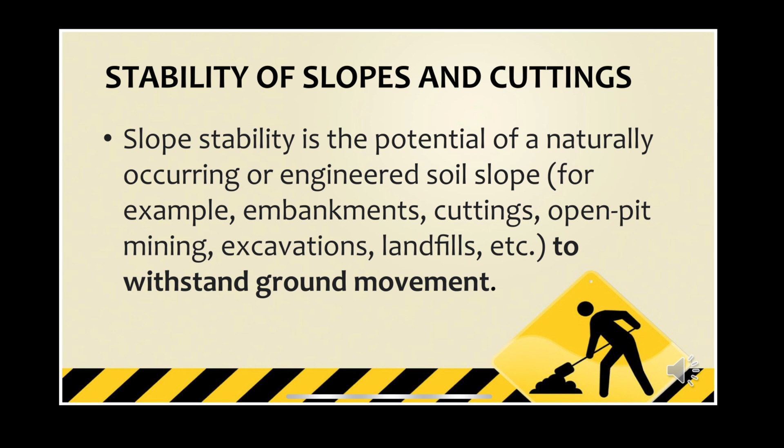We have examples of engineered soil slopes: embankments, cuttings, open pit mining, excavation, and landfills. We also have the stability of cutting in rock, which is usually dependent on the occurrence of joints and other planes of weakness, and on the amount of cohesion and friction across these planes.

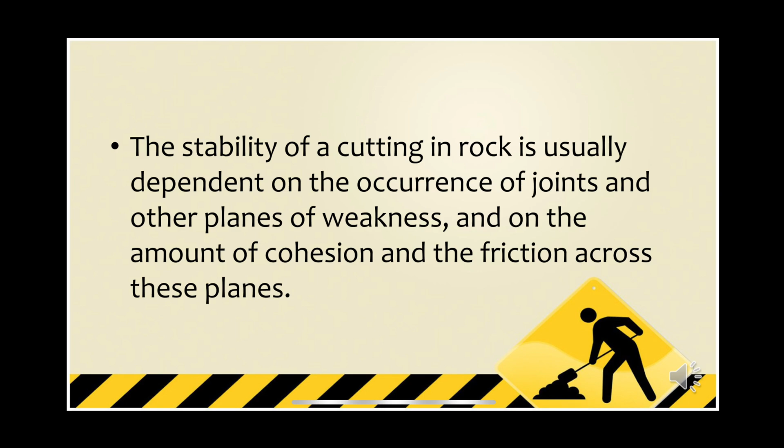We have geological factors affecting the stability of a new excavation. The static conditions that control the initial and later stability of a steep face cut into soil or rock, which may determine the need for support or remedial treatment, are as follows.

First we have shear strength. Shear strength by definition is the ability to resist forces that cause the material's internal structure to slide against itself. So the shear strength of the material forming the cutting is the stability of cutting in a rock that is usually dependent on the occurrence of joints and other planes of weakness, and on the amount of cohesion and friction across these planes.

We also have the structure of rocks and soils, specifically how any planes of weakness are oriented relative to the newly exposed face. For example, horizontal bedding planes in poorly jointed sandstone often give near vertical faces which are stable, whereas faults or joints striking parallel to the new face and dipping steeply towards it will probably be planes of movement or potential instability.

We also have groundwater condition, where saturation significantly lowers the strength of most soils compared with their values when dry. Certain soils weaken to a stage at which they run like viscous liquids. High pore pressure of groundwater in a layer or any plane of weakness lowers frictional resistance to movement. This mechanism is the same as that which allows a hovercraft to glide over water or land on high pressure cushions of air.

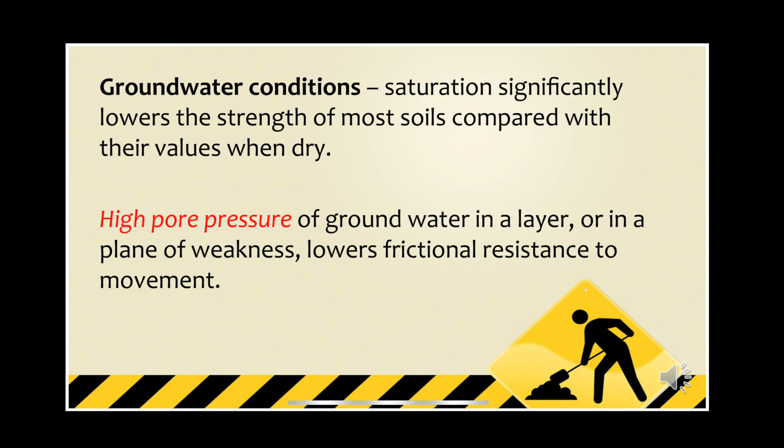We have the tragedy, a disaster in Aberfan in 1966, when a spoil heap of mine waste slid downwards onto a Welsh village, enveloping and destroying a large part of the local school.

We also have stresses produced by natural loads adjacent to the cutting. Steep-sided valleys or mounds affect the state of stress in the ground near the surface, not only below themselves but also for some distance around. This lateral change in stress conditions may be sufficient to cause instability of weak rocks and soils.

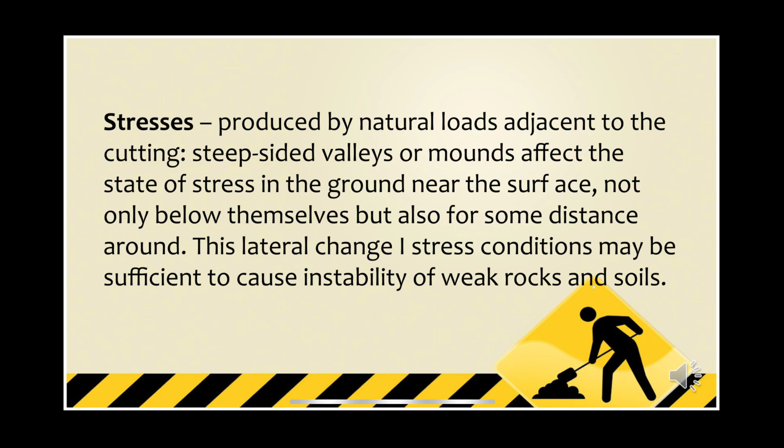Also, we have other geological factors causing instability of existing slopes. An initially stable slope may become unstable with the passage of time because of human disturbance. This may consist of adding a fresh load such as a spoil heap, removing support by excavating, or triggering movement by vibration from nearby heavy machinery.

So we have common geological causes that cause instability of an existing slope. First, we have weathering of the soil or rock of the slope so that it becomes weaker. This may affect the bulk of material, for example boulder clay, or may be concentrated along planes in a rock. Chemical alteration of existing minerals is important under certain conditions, as is mechanical breakdown in others.

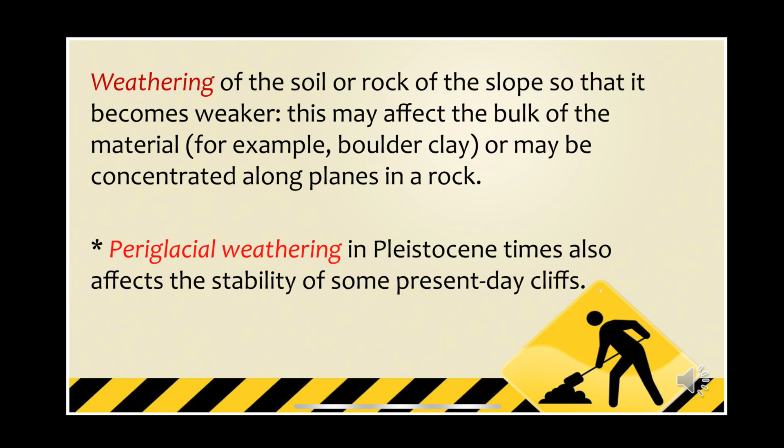We have periglacial weathering in Pleistocene times, which also affects the stability of some present-day cliffs. Erosion of the slope by a river or natural agent, usually at its base but possibly along a weaker layer or plane, may cause undermining to take place.

Also, the change in water content of the soil or rock. Heavy rain, especially after drought, saturates the material forming the slope, increasing its mass and gravitational pull on a given volume, and also reducing the strength of soils and friction along any discontinuities.

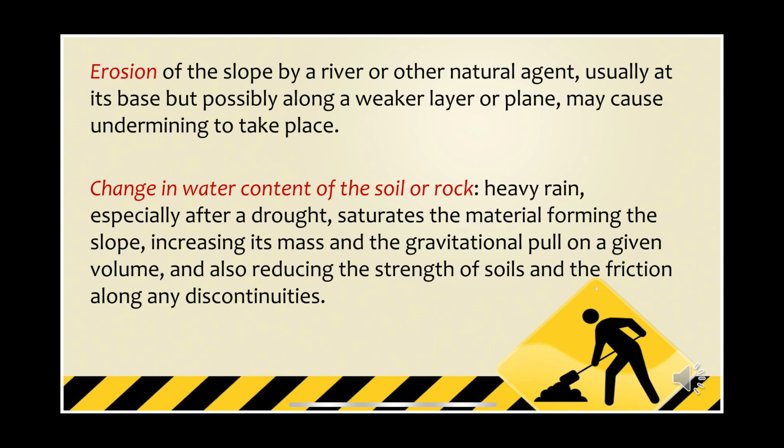There are types of failure of soil slopes. Instability of soils on a slope may take one of the following forms. One of these is creep. Creep occurs on steep slopes and produces a downhill movement at low rates, less than 10 mm per year, of the top few meters of soil.

It is facilitated by the effects of frost and by heavy rain washing out fines from the soil. Any excavation on a slope affected by creep is likely to increase movement. Creep may be recognizable by displacement of fencing or cover of turf, or by the drag effects of strata under the soil.

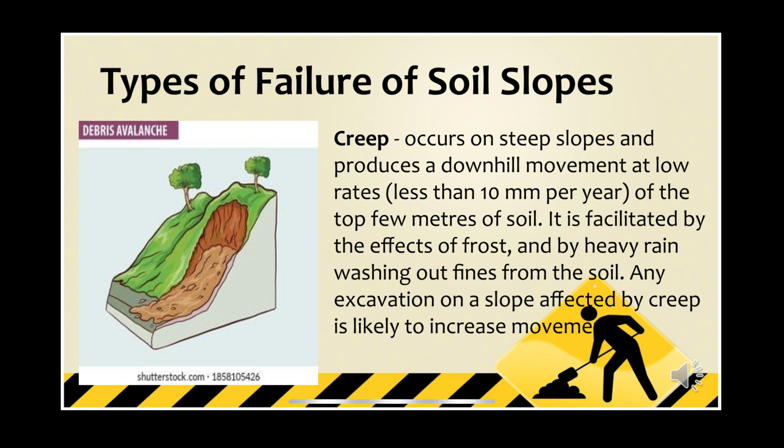We also have flow. It is a rapid movement of waterlogged soil, broken rock, and mud downhill. It usually happens after a prolonged rain has occurred.

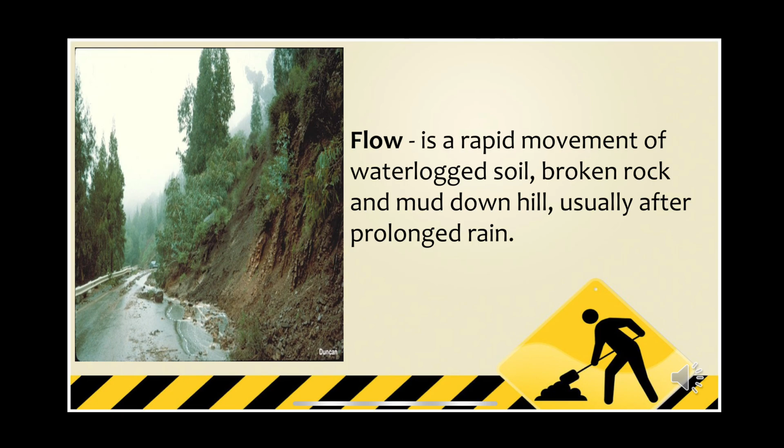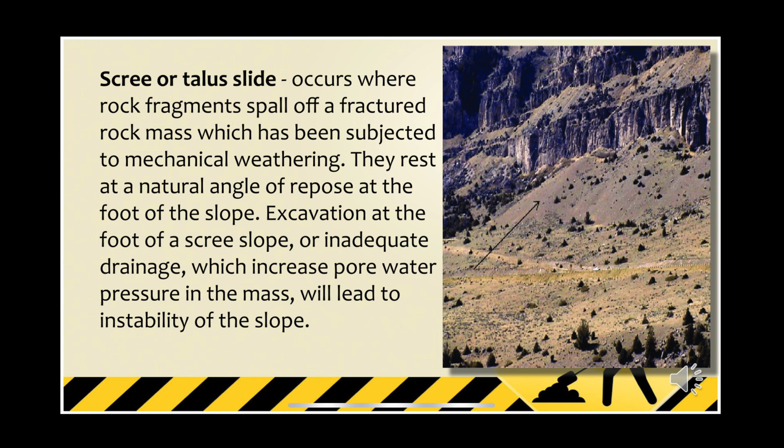Scree or talus slide occurs where rock fragments spall off a fractured rock mass which has been subjected to mechanical weathering. They rest at a natural angle of repose at the foot of the slope. Excavation at the foot of the scree slope, or inadequate drainage which increases pore water pressure in the mass, will lead to instability of the slope.

The third is translational failure, which involves movement along a particular plane of weakness in the soils of the slope. For example, in a slope formed of a clay layer within sand layers, deterioration of the shear strength of the clay may lead to movement at the boundary of the clay and sand. Failure of this type may occur with a slope angle as low as 6 degrees.

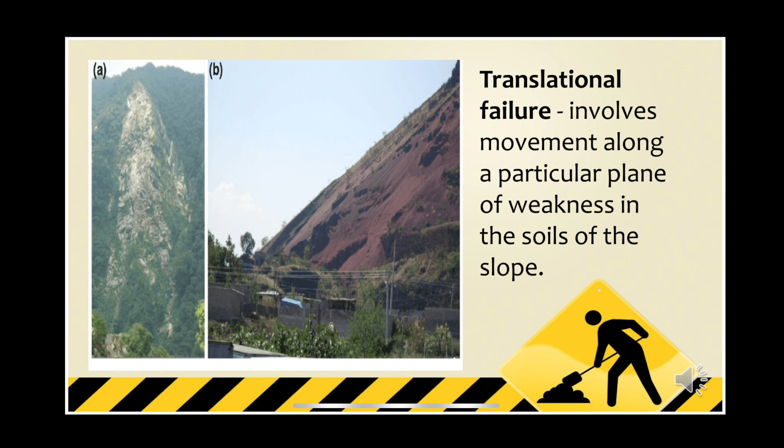Lastly, we have rotational slip. Rotational slip affects clay or clay-rich rocks such as mudstone and shales. The surface of movement is curved, such that shear resistance along it is given by the equation: shear resistance equals cohesion added to the difference between the normal stress and the pore water pressure, times the angle of frictional resistance of the clay. Rotational slip is usually preceded by the development of vertical tension cracks at the top of the slope.

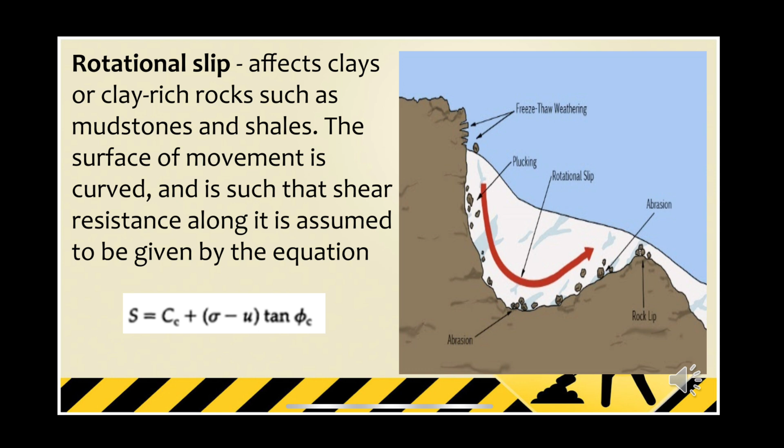This slide shows the legends of the shear resistance equation: the stress normal to the surface, pore water pressure, cohesion of the clay, angle of frictional resistance of the clay, and the shearing resistance.

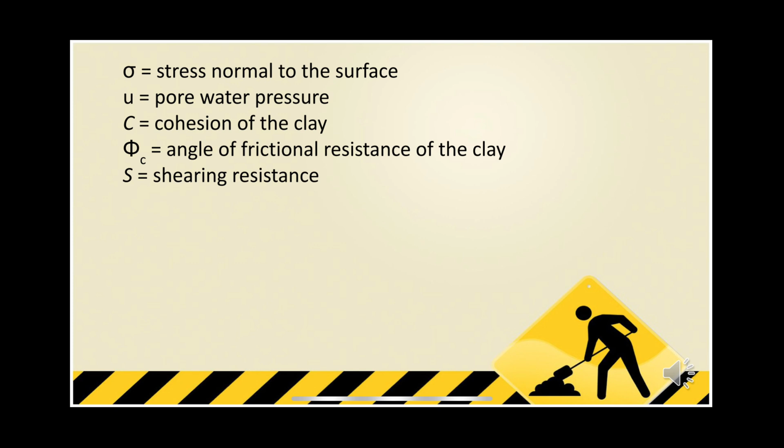There are also types of failure of natural rock slopes. One of these is minor rock falls, produced by weathering acting on unstable rock slopes. The susceptibility of a given rock to weathering processes can be estimated by determining its saturation moisture content and swelling coefficient. Igneous and high-grade metamorphic rocks with values of less than 1% are generally safe from weathering effects.

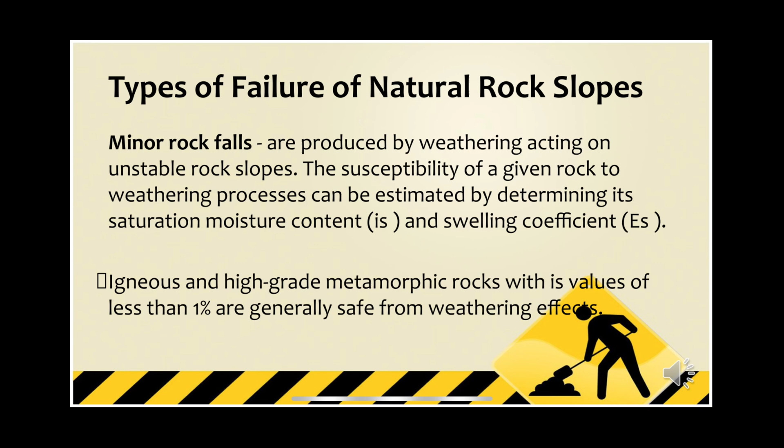Sedimentary rocks and low-grade metamorphic rocks are considered safe on slopes if their values are less than 3%. If exposed rocks on a slope have high saturation moisture contents, tests should be carried out over a period of time under both freeze-thaw and wet-dry conditions, and their swelling behavior noted. Ice action is important if joints are present. If the rock mass has a low block volume, less than 0.5 cubic meter, minor rock falls may occur even if the rock has low saturation moisture content.

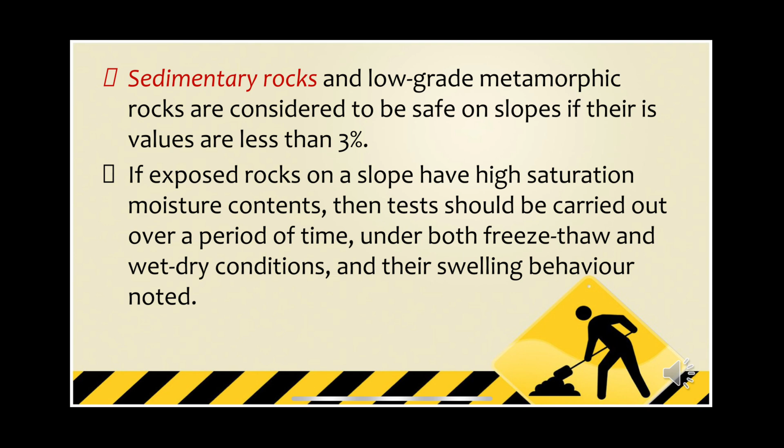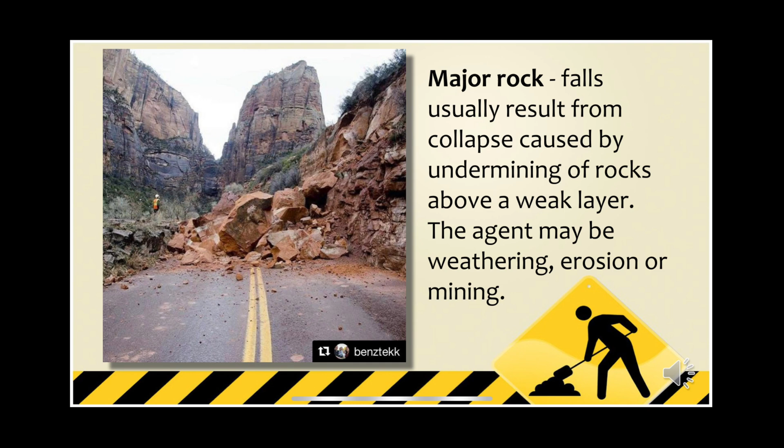There are also major rock falls, which usually result from collapse caused by undermining of rocks above a weak layer. The agent may be weathering, erosion, or mining. Common weaknesses in a rock mass which can lead to collapse after weathering and etching out by erosion are layers of clay rock, chlorite in joints, and carbonate rocks, including calcareous sandstones.

Translational failure along a particular plane of weakness may occur in rock masses cut by faults, master joints, or steep bedding planes. The shear strength of the infill in these discontinuities determines the stability of any slope cut in the rock mass. As in soils, the shearing resistance along any plane is given by the equation of shearing resistance.

If the discontinuities are infilled with weak material such as clay, stability of a slope in such a rock mass will depend on its shear strength. Where a rock mass consists of alternating layers of strong and weak rocks, tests in situ and in the laboratory are necessary to determine whether failure is likely to occur because of shear failure in the weak bands, or because of sliding along the bedding planes if they dip steeply.

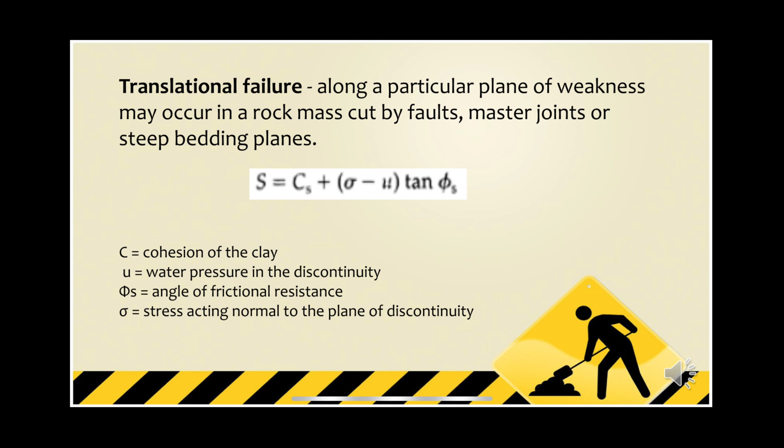Rotational failure occurs when the stress generated by gravity on rocks near the slope exceeds the inherent strength of the rock mass. This may be accompanied by translational failure. The extra load of a spoil heap may trigger this failure.

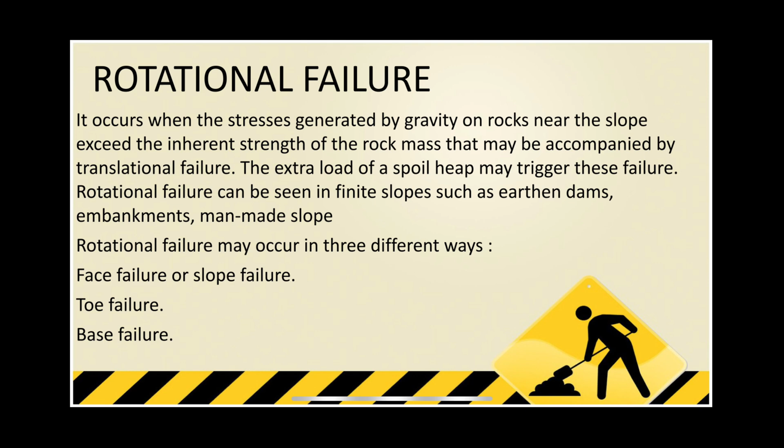Face failure or slope failure occurs when the soil above the toe contains a weak stratum. In this case, the failure plane intersects the slope above the toe.

Toe failure is the most common failure, in which the failure plane passes through the toe of a slope. Base failure occurs when there is a weak soil stratum under the toe, and the failure plane passes through the base of the slope.

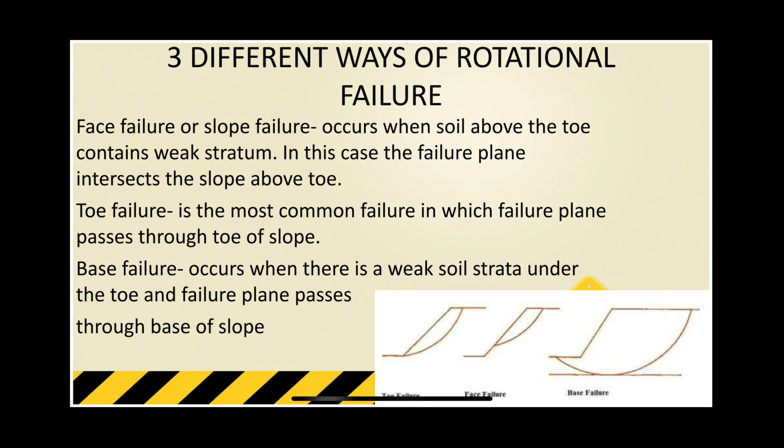Creep failure. It takes place when certain rocks such as clays absorb water, swell, slowly deform and move downhill. If they are overlain by a more stable, stronger layer, translational failure may take place along the bedding plane between them. Creep failure is time-dependent and permanent deformation of a material when subjected to a constant load or stress. This deformation typically occurs at elevated temperatures, although it may occur under ambient temperature as well.

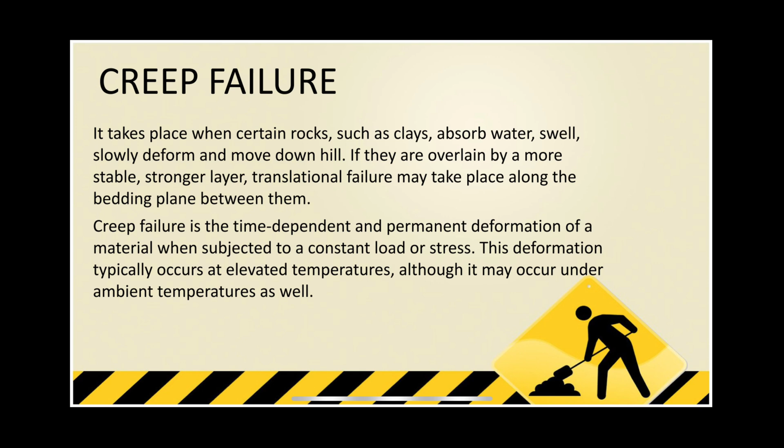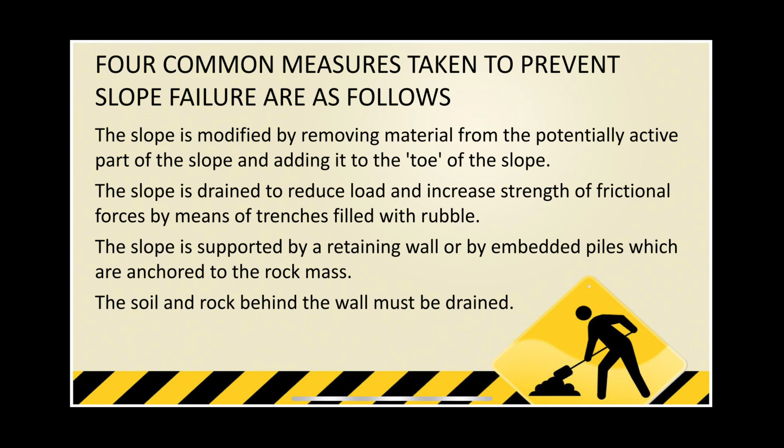4 common measures taken to prevent slope failures. First, the slope is modified by removing material from the potentially active part of the slope and adding it to the toe of the slope. Second, the slope is drained to reduce load and increase strength of frictional forces by means of trenches filled with rubble. Third, the slope is supported by a retaining wall or by embedded piles which are anchored to the rock mass. The soil and rock behind the wall must be drained.

Fourth and last, an unstable rock face may be stabilized either by bolting or by using steel mesh. Bolting is used to anchor large unstable blocks and the steel mesh to cover entire sections of an unstable steep rock face. Where such unstable slopes exist, for example, in a new road cutting, sufficient shoulder width should be allowed to absorb debris and a side ditch excavated with or without a rock fence to protect the new road.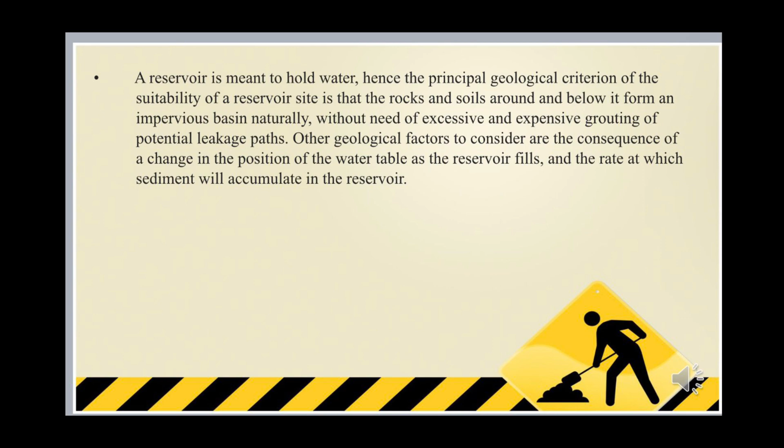An important consideration for selecting a suitable site for a reservoir is that the rocks and soils around it should naturally form an impermeable basin. Other factors to consider are the consequence of a change in the position of the water table as the reservoir fills, and the rate at which sediment will accumulate. Wells. The important sources of leakage from the reservoir are A, through the permeable soils, B, through rock aquifers, and C, along faults and master joints. The first one is A. In regions that have escaped glacial erosion, there may be a thick mantle of weathered rock forming a permeable soil. Other deposits, particularly sand and gravel, may offer paths for leakage.

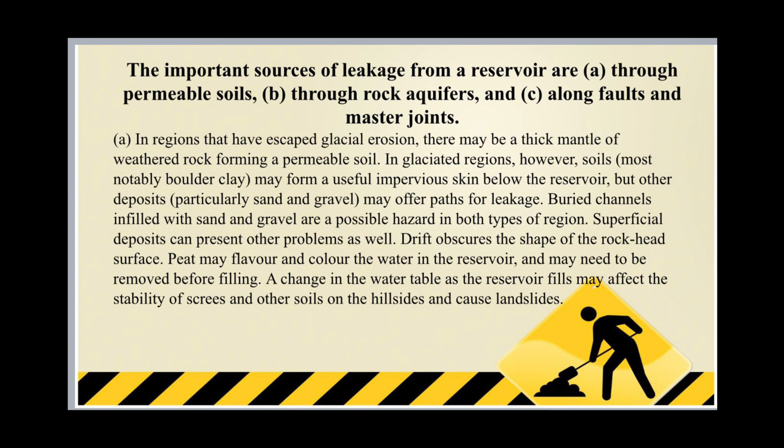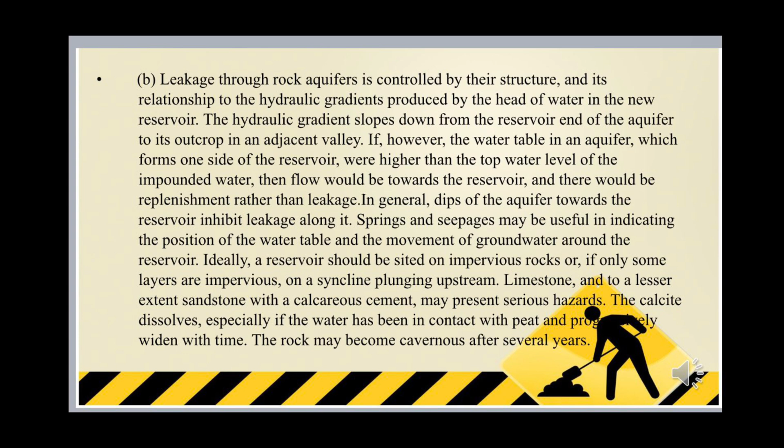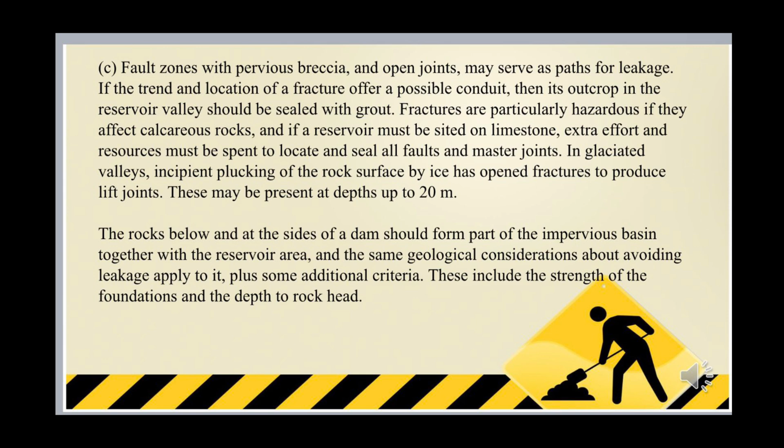The last one is C. If the reservoir is sited on limestone, extra effort and resources must be spent to locate and seal all the faults and joints. In glaciated valleys, incipient plucking of the rock surface by ice has opened fractures to produce lift joints. These may be present at depths up to 20 meters. Large dams are almost invariably founded on strong solid rock, and the thickness of any cover of soils and the strength of rocks at the dam site are important factors in geology. Mapping the position of rockhead over a glacial rock basin may add significantly to the cost of exploring a dam site.

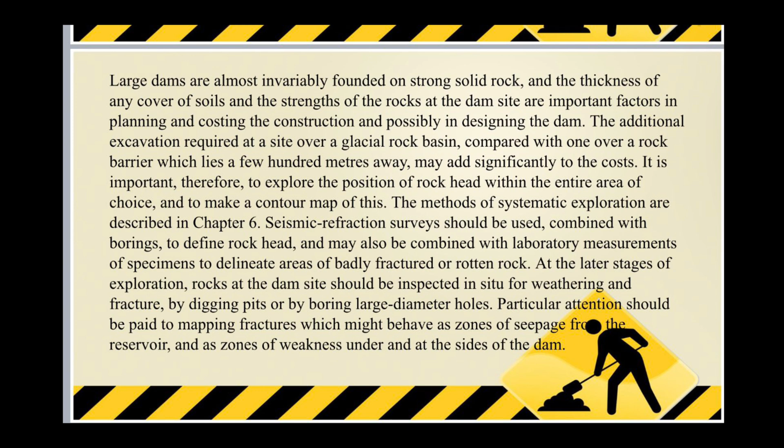Seismic refraction surveys should be used combined with borings to define rock heads. Particular attention should be paid to mapping fractures which might behave as zones of seepage from the reservoir.

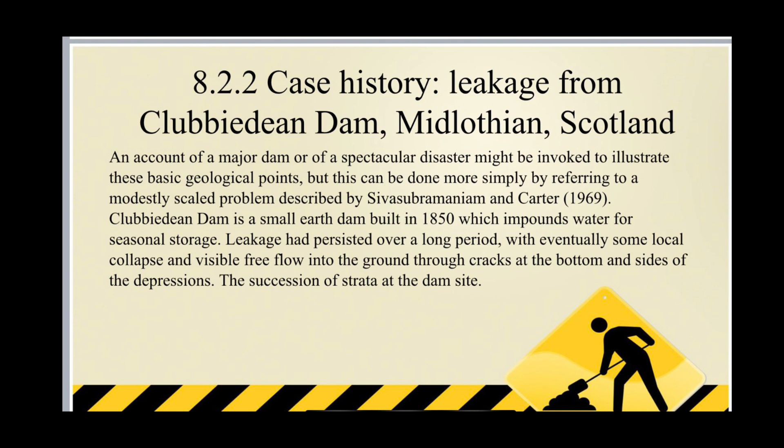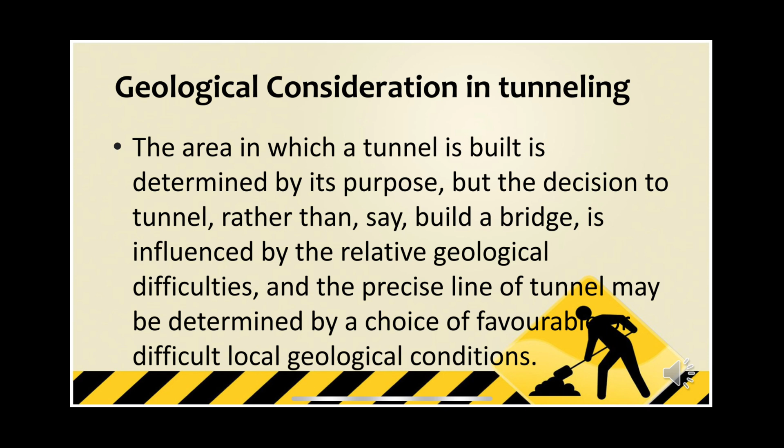Geology of tunnels. Geological consideration in tunneling. The area in which a tunnel is built is determined by its purpose, but the decision to tunnel, rather than, say, build a bridge, is influenced by the relative geological difficulties, and the precise line of tunnel may be determined by a choice of favorable or difficult local geological conditions.

The geological factors considered in tunneling projects are as follows. The first, we have the ease of extraction of the rocks and soils. The second one is the strength of the rocks and the need to support them. Next, we have the amount inadvertently excavated beyond the perimeter of the tunnel outline, that is, overbreak, particularly where explosives are used. Next is the groundwater conditions and the need for drainage. And lastly is the temperature in very deep tunnels and the need for ventilation.

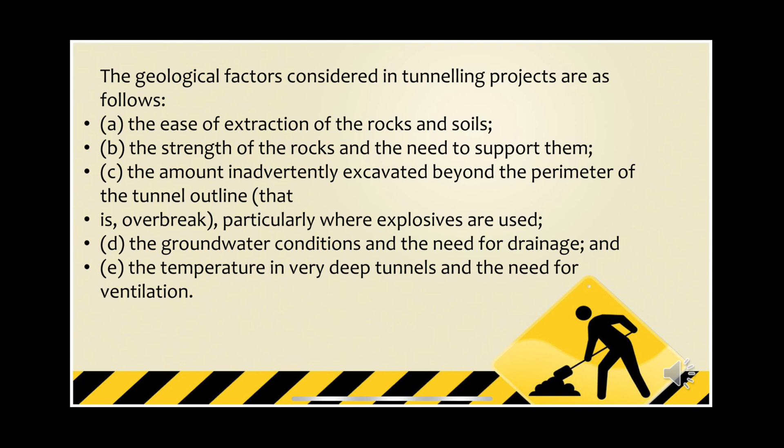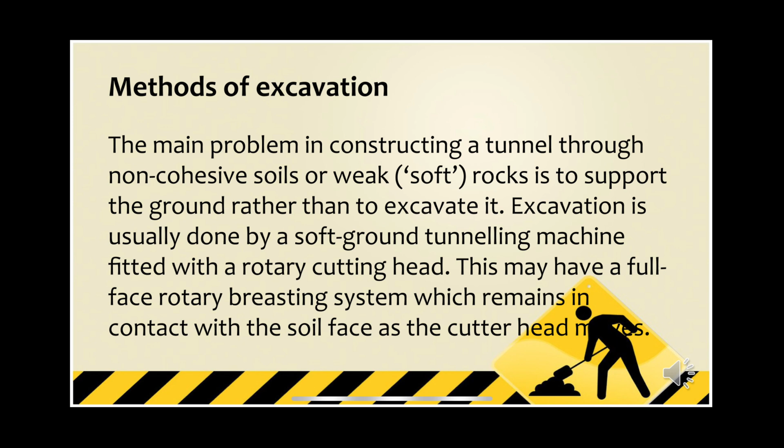Methods of excavation. The main problem in constructing tunnels through non-cohesive soils or weak rocks is to support the ground rather than to excavate it. Excavation is usually done by a soft ground tunneling machine fitted with a rotary cutting head. This may have a full-face rotary breasting system which remains in contact with the soil face as the cutter head moves.

The principal factor controlling rate of progress and cost in constructing a tunnel in strong rocks is usually relative ease of excavation. The traditional method is to blast out successive sections of the tunnel by drilling a pattern of holes in the rock, charging them with explosive and firing. The need for any support and the type of support used are dependent on the relative stability of the roof and walls of the tunnel.

Complications arising from local geological conditions. In soft rock tunnels, heterogeneous rock or variable conditions at the face can produce serious problems and add to costs. A boulder clay or soil containing large pebbles creates a near impossible problem for existing slurry face machines. Hard rock rolling cutters can cope with hard boulders but have difficulty in other soft soils. A mixed face of hard rock and wet non-cohesive soil presents an even worse headache to the engineer.

The variation in strength of the soils along the tunnel line should ideally be anticipated so that appropriate support can be used while the face is being excavated. Inability to do so can result in over-excavation.

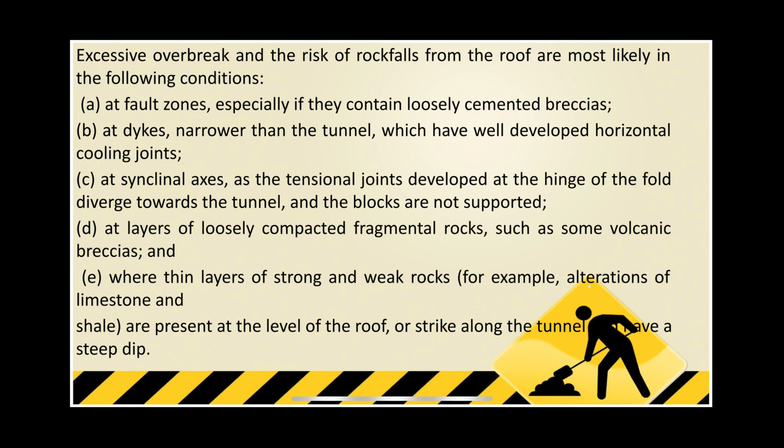At layers of loosely compacted fragmental rocks, such as some volcanic breccias, and where layers of strong and weak rocks, for example, alternations of limestones and shales, are present at the level of the roof or strike along the tunnel and have steep dip.

The ideal tunnel outline is shown by the heavy broken line. The strata to be excavated are alternating shales and well-jointed limestones, dipping steeply and striking parallel to the tunnel. The actual amount pulled out by explosives along the planes of weakness is indicated by the heavy black line. This excess rock excavated beyond the perfect section is called overbreak.

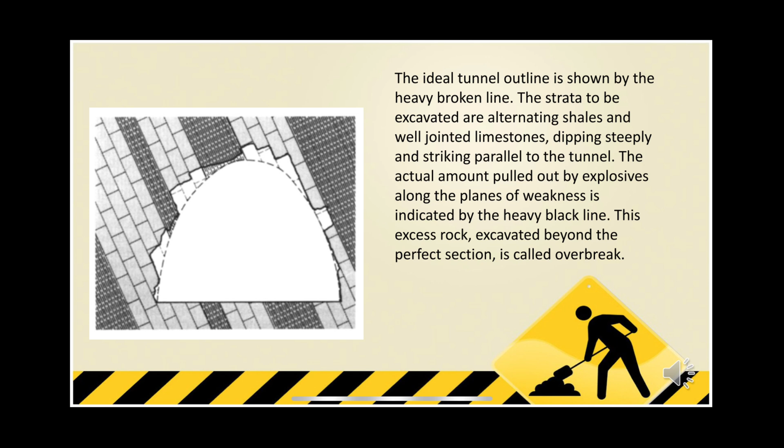The amount of seepage into a tunnel through pervious rocks and joints may be a significant factor in design. It must be assessed from a knowledge of groundwater conditions, bulk permeabilities of rock, and the geological structure. For example, crystalline rocks, such as granites, gneisses, and schists, are typically dry except for flow along joints and faults, and perhaps at the margins of any dikes which cut them.

In pervious rocks, the flow of groundwater into the tunnel is likely to increase at fault zones and at synclinal axes, which tend to channel flow towards the tunnel.